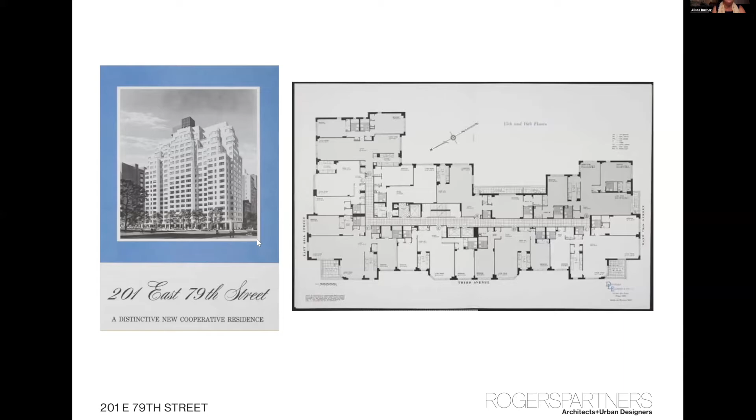The building is white brick, and this was a very popular material in this time period. We think there are hundreds of very similar buildings, particularly on the Upper East Side, which is an elegant part of Manhattan.

And you can see we did some probes to discover what was behind the facade. And you can see there's not even an inch between the brick and the block backup. And we found that the block backup behind the brick was also in very serious decay, with a lot of air spaces between the blocks.

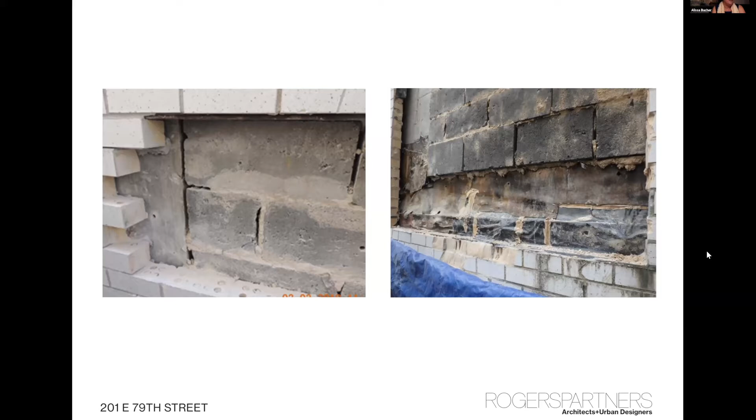So we were engaged to reclad the building. And the decision was made based very much also on bringing the building up to meet the current energy standards or the future energy standards of New York City. The larger buildings are going to be required to reduce carbon emissions by stipulated percentages over a series of steps between now and 2050.

And this is an example of how the building department will come around and pin your grade up on the window of your building. So this building is evidently not doing very well.

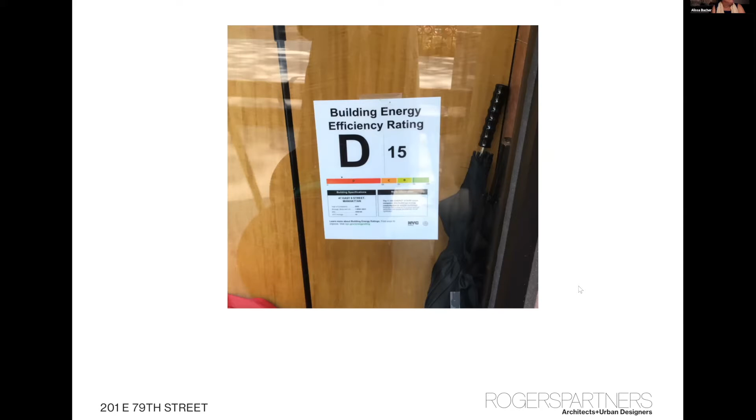So it was a very interesting challenge to do this recladding, because even though it's a design problem, it's a very specific problem, because you can't move or change any of the window openings because you would be affecting the apartment interiors. But we wanted to get away from this really sort of super functional exterior where they hadn't spent any extra money to try and make the building elegant.

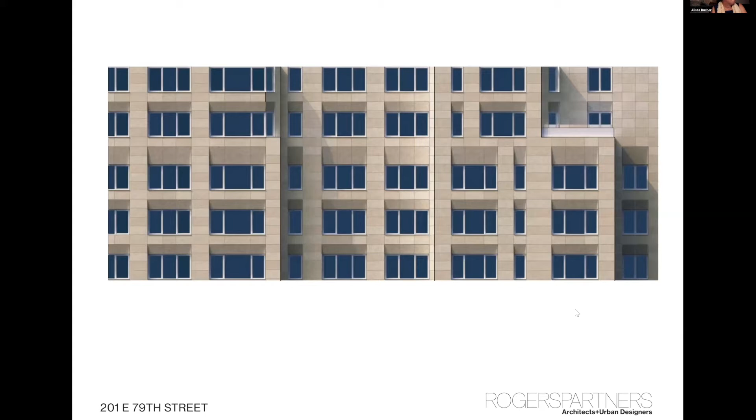And so we came up with this idea of installing these tiles above the windows at a slant, so that we would reduce the area of the flat facade and make it feel more frame-like and open and more contemporary. And we did some design studies to look at how this would look. And this is an early sketch showing the new construction.

So we stripped off the brick, and New York City zoning permits you to add to the size of your building, sorry about that, without any penalty as far as permitted floor area. And so we put about 4 extra inches on the outside of the building. We added 4 inches of mineral wool insulation, and we are using an open rain screen facade system.

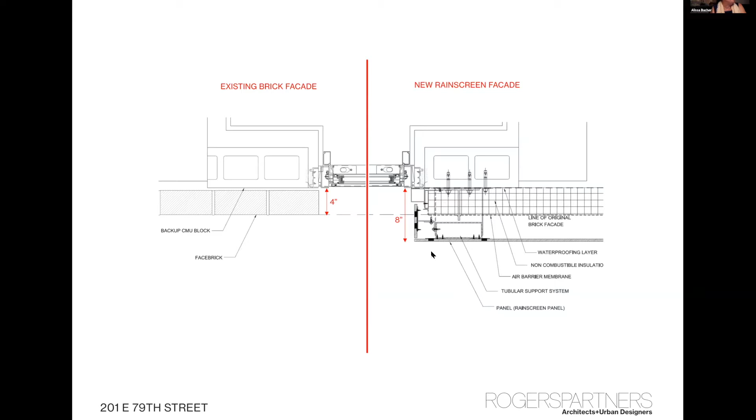The idea of the design was to sort of play on the idea that it was fake stone by increasing the pixel size of a real stone image so that the pixels are about 1/2 inch by 1/2 inch.

And it was kind of a way to make, let's say, something like a Chuck Close effect, where when you're a distance away, you don't see it, but when you get up close, you realize that it's not stone, that it's actually a fake stone.

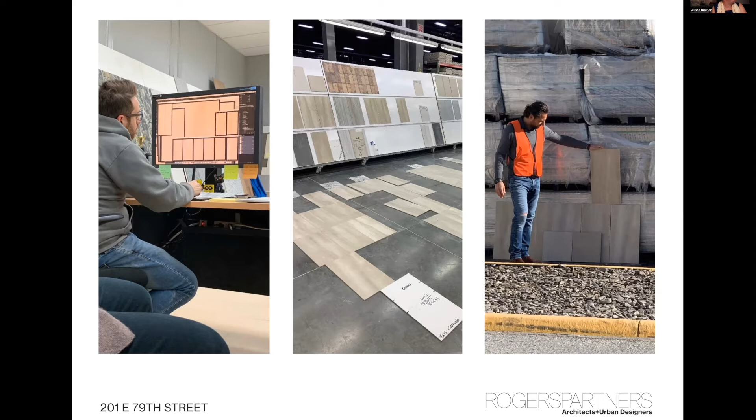So here we are in Tennessee, developing the typical tiles you can see in the background there. We were studying color. And then we made a mock-up on site, testing our window frame design. Another challenge of the project was that the windows are not perfectly lined up from floor to floor or between windows on a given floor. And so we had to take up the tolerance in the width of the window frame, which does vary from window to window to some extent.

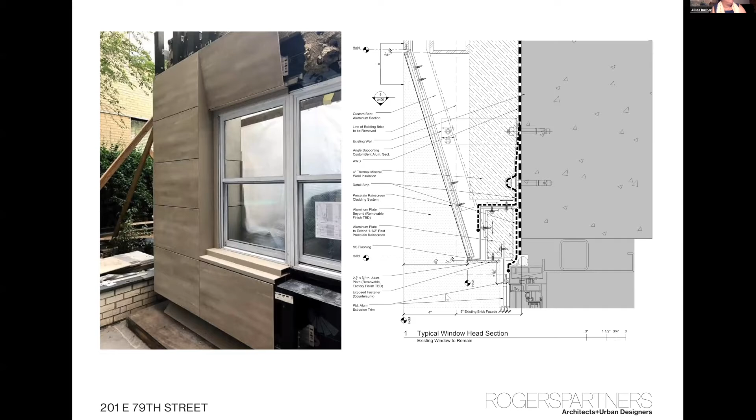And then this is another aspect of the project. We know that building ventilation is essential to controlling energy costs. And the original building system had really unregulated air intakes in all of the living spaces associated with the air conditioning units in each of the living spaces.

And what would happen was that on the lower floors, you have a serious stack effect in the building. So the lower floors had a huge amount of air coming in. And then there was so much pressure buildup in the top of the building that the pressure was actually made up by air coming out of the bathroom vents. So this was not a desirable situation either.

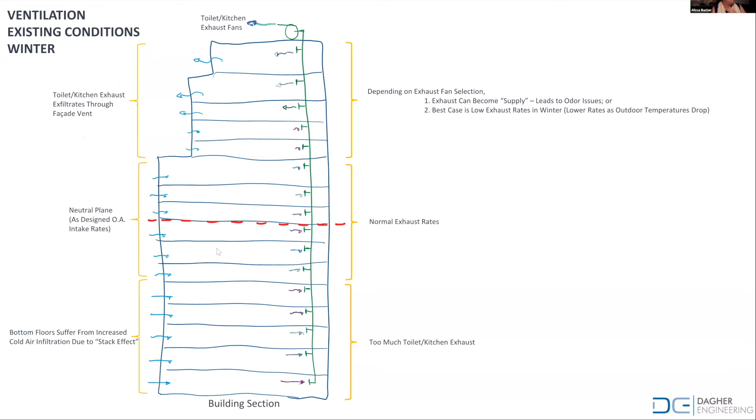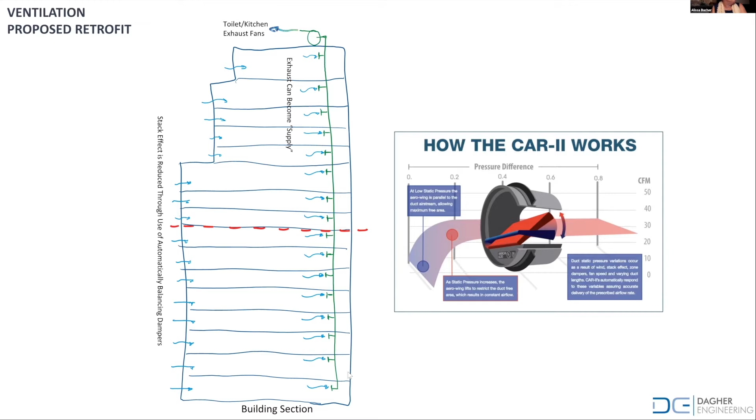So what we did was we introduced these dampers that regulate the amount of air coming into the building. And the dampers were introduced both at the window intakes and at the bathroom exhausts, so that the air in the building will be balanced. And this is the air conditioning unit. The damper was installed below the air conditioning unit. These are the little air intake vents on the exterior of the building.

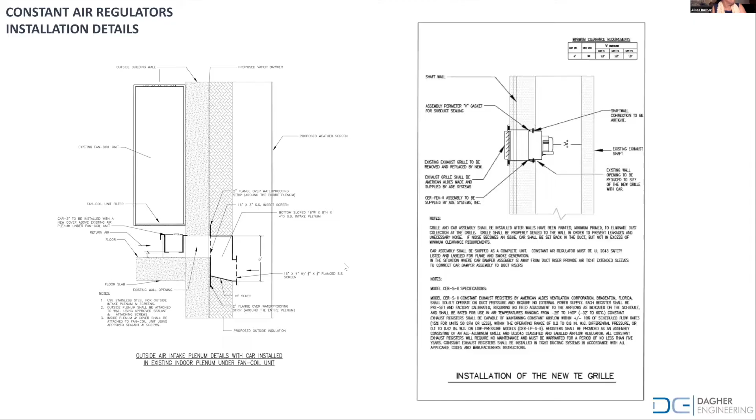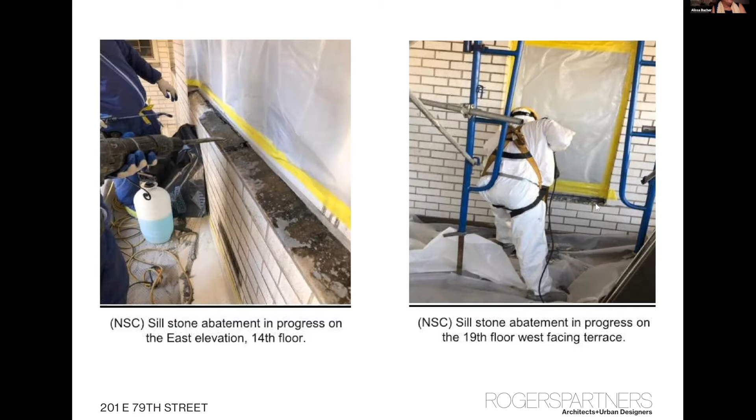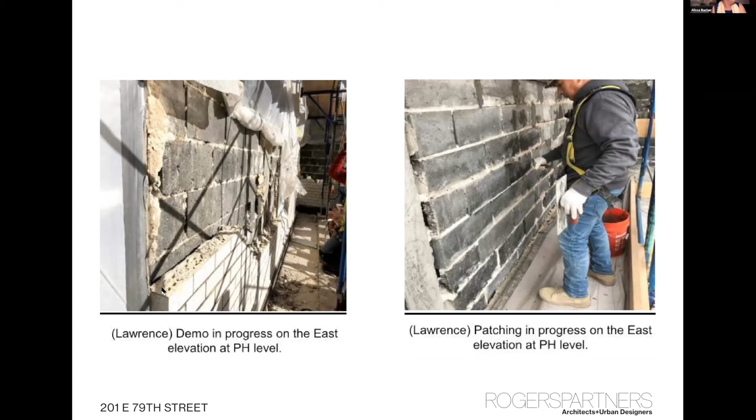So starting construction, the first step was to do the removal of the windowsills, which had some asbestos material. And so we had to do an abatement of the windowsills. And then you have the stripping off of the brick. We started working at the top of the building and they worked their way down. And then here you can see they repointed the block, and then here they're parging the block, and you can see this is the air intake below the window.

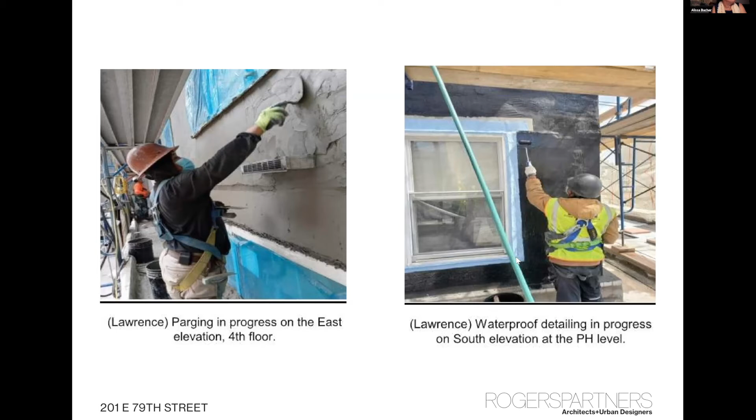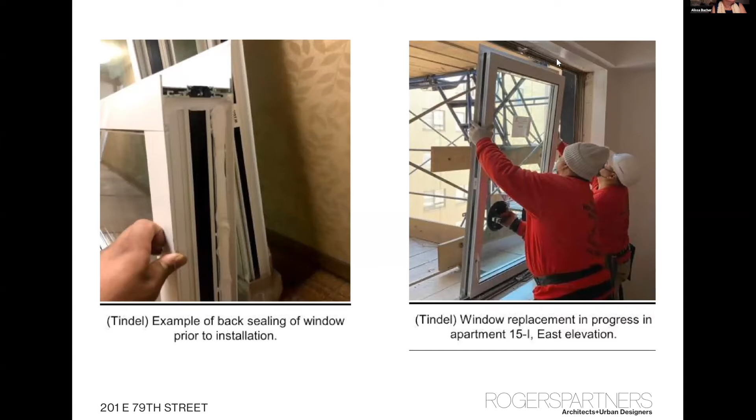And then here you can see the waterproofing that marries the window frame to the wall, and then the liquid waterproof goes over that. And this is what you want to get access to when you replace windows in the future, so that you can recreate this seal around the windows. And here, some of the windows were replaced. We have the sealant going in. We have back seal around the windows. And then we have backer rod around some of the windows where the windows were very proud of the wall.

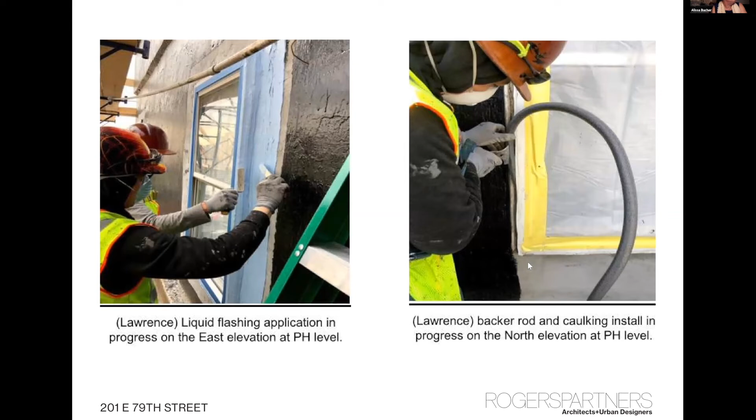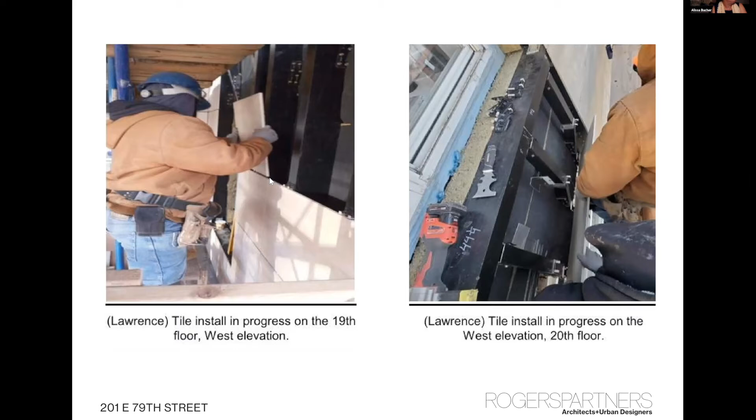And then here they're installing the tubes that support the rain screen system. And then after they put the tubes on, they cut and install the mineral wool insulation behind the tubes. The tubes are installed with special fasteners that minimize thermal bridging. And then on the left is the final stage, which is the installation of the tile. And then finally, we get the window frames going in.

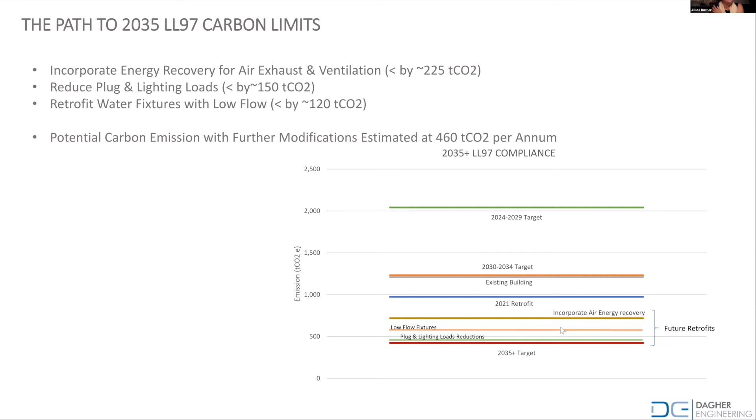And then in future interventions, we could figure out how to get an energy recovery ducting system into the existing shafts, which is going to be interesting. Installing low flow plumbing fixtures to reduce the cost of hot water and reduce other electrical costs. And that's it.